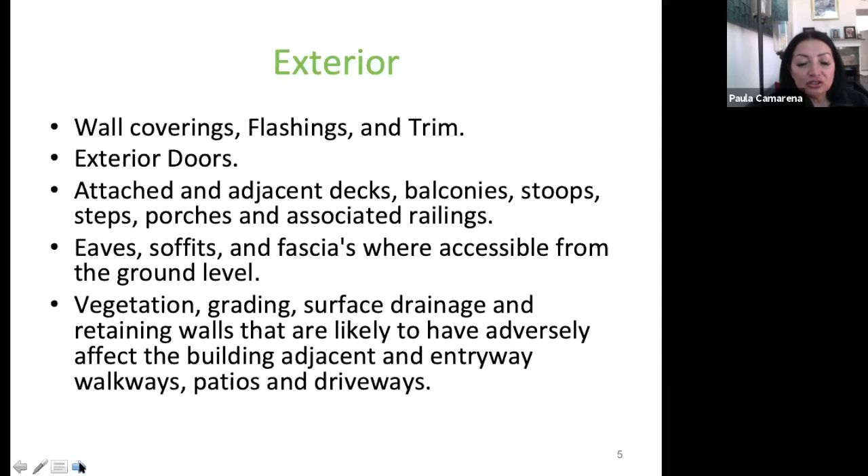So vegetation and grading, how the surface is draining. It's important that when you have a house, that when it does rain, that it's all draining away from the house, not towards the house. So the way that's graded is really important. You could end up with some real foundational issues if that is not taken a look at. So we look at that as well.

Roofing material, right? We talked about this. The materials, what type of roof it is. It's very important that we know what type of roof it is, because certain roofs last longer than other roofs, right? And then it's also going to require some maintenance, right?

So the one thing that I do say about roofs is great big trees are really nice, but keep them trimmed and away from the roof. They actually cause you to have rodents coming onto your roof, and it also wears the roof quicker than normal. So trees are lovely. We don't want to get rid of the trees, but just maintain the trees.

That's really important. Roof drainage system, we kind of went over that. It needs to drain away from the home, away from the foundation. Very important. Skylights, chimneys. Skylights tend to leak quite a bit. They will end up leaking at some point when you're in the home. It's important to keep an eye on that. So we do take a look at skylights.

Okay, and then we also have to describe the method that we use to inspect the roof. That is part of the ASHI requirements.

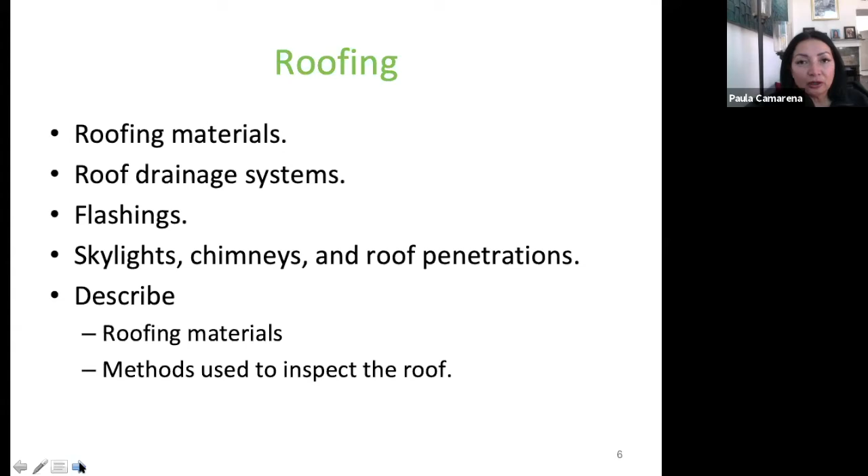Okay. Definitely look at the plumbing, all of it. We flush the toilets, run the faucets, blah, blah, blah. But on top of that, we want to make sure that everything is venting out correctly from a plumbing perspective. We want to make sure that the water heater and the hot water supply systems are venting correctly without causing any major issues, right? Fuel storage, things of that nature are very important.

We need to describe the energy source that the water heater is using. There are water heaters out there that are electric water heaters. There's nothing wrong with an electric water heater. Electric water heaters actually last longer than a gas water heater, but we still need to notate what type of water heater that is. And we also need to notate where the main water shutoff is. That's an important component to the home inspection.

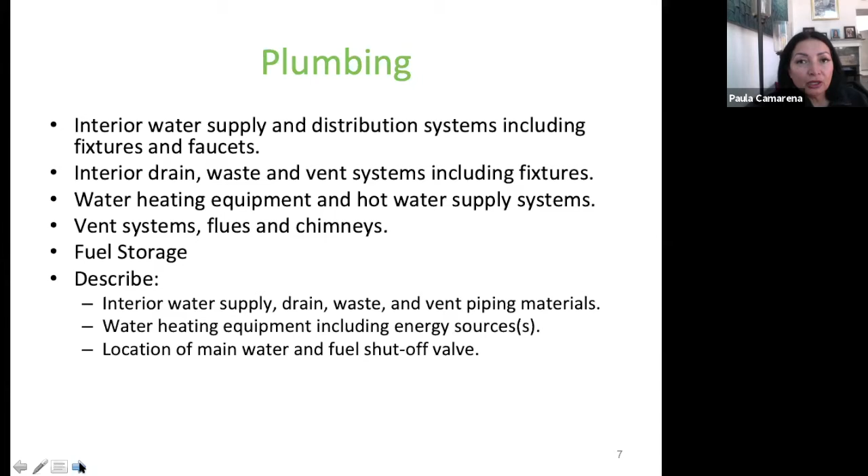And on the electrical system, the service drop. Where is the electrical coming? Is it coming from underneath the home or is it coming above? And then the entrance conductors and what type of materials those are. It could be either aluminum or copper, depending on the age of the home and how the home was built, right?

We show you all the disconnects. That's really important. The main disconnects are really important, and how the service is grounded. All that needs to be shown and actually explained in the inspection report, which is something that we're trained on.

Overcurrent protection devices. Is there too much current going through a particular circuit breaker? So that's one thing that we want to make sure we have a good handle on: is there just enough current running through the electrical panel and the circuit breakers and not too much? And we'll get into how we actually do that without touching the actual electrical panel, because touching the electrical panel, as we know, is not a good thing, right?

And then also the ground fault circuit interrupters, GFCI, right? Those all need to be where there is water. So if there is a sink, you need to have GFCI. So bathrooms, kitchens, garages that have sinks, they all need to have GFCIs next to them, any type of receptacle.

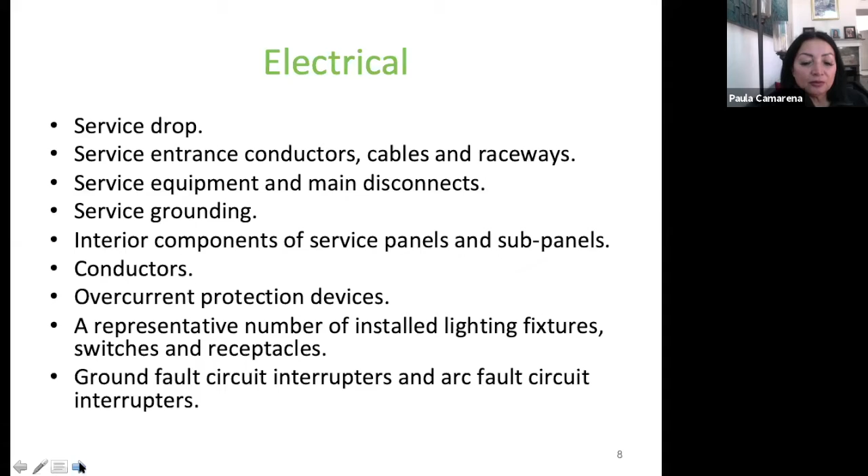The amperage, how big of an amperage do you have? The other day I went to a home, actually it was in the storm last Tuesday, that was, I think, pretty close to 1,700 square feet. It had 70 amps running through it. Wow. 70 amps is not a lot for a 1,700 square foot home. And I definitely did call that out because that is not a lot. For a home like that, it probably should have like 100 to 150 amps, but those are the things we kind of take a look at as well.

And then also any sub panels, right? And then we also need to look at the smoke alarms and carbon monoxide detectors. So carbon monoxide detectors are now required by the state. So I don't know if you know that, but those are required. And I doubt you'll be able to get your home closed unless you have a carbon monoxide detector. The good thing is they have plug-in ones and they're not expensive, and you can just go to Home Depot and buy one real quick. So that's not a big deal.

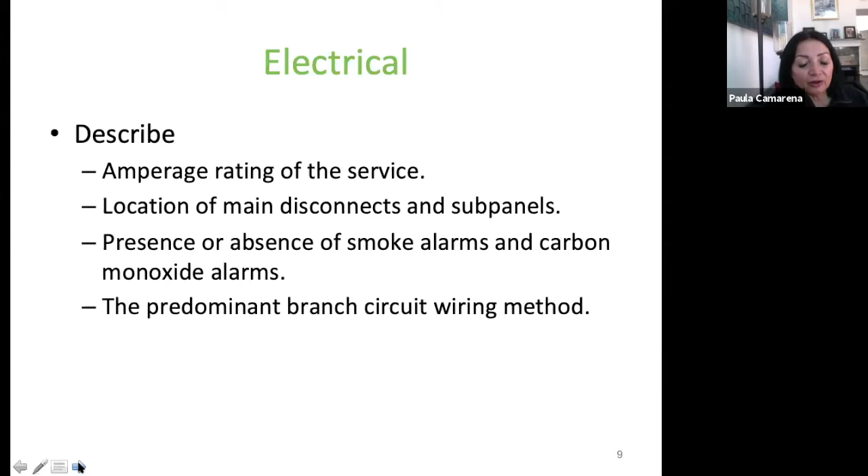Yeah, the only people who are checking that are the appraisers, it seems like. And if you're all cash, it's like nobody really checks that stuff. So it's up to the buyer to know that. So that was good that you pointed that out. Yeah. And then the branch circuit wiring in the panel does need to be, most of the time, copper. I really think that copper is the best, and that the branch circuit wiring in the electrical panels should be copper. There are some very few that I see that are aluminum, but it should be copper.

So we have a lot of houses that are older, even like my house, 1920s, and a lot of them are knob and tube still. What are your thoughts on that? I mean, you can live in any of these types of homes like knob and tube, but you just need to understand that there will be limitations, right? 2-prong versus 3-prong in your home, right? Some appliances may or may not work really well with knob and tube. Eventually, you may want to upgrade that.

But I do not call it out and say this is a problem, because like you were speaking, Nick, in your area, you have knob and tube, and there's a lot of historical homes in Orange that are absolutely gorgeous that still have knob and tube. And there's nothing wrong with knob and tube. It's just there is going to be limitations. I just let the client know that it does have knob and tube. You can live in this. It's not going to kill you, but eventually you might want to upgrade. Got it. So those are the things.

That's good. Checking the venting systems and flues and chimneys. Those are the things that we look at as well. And then, of course, I talked about the energy source and the heating systems. So let's talk about energy sources for a minute. We talked about carbon monoxide detectors and how they're really important and how it is a requirement. However, I've been in some of these high-rise buildings, particularly in Long Beach, that don't even have gas. They are all electric. So the question is, do they require carbon monoxide detectors still?

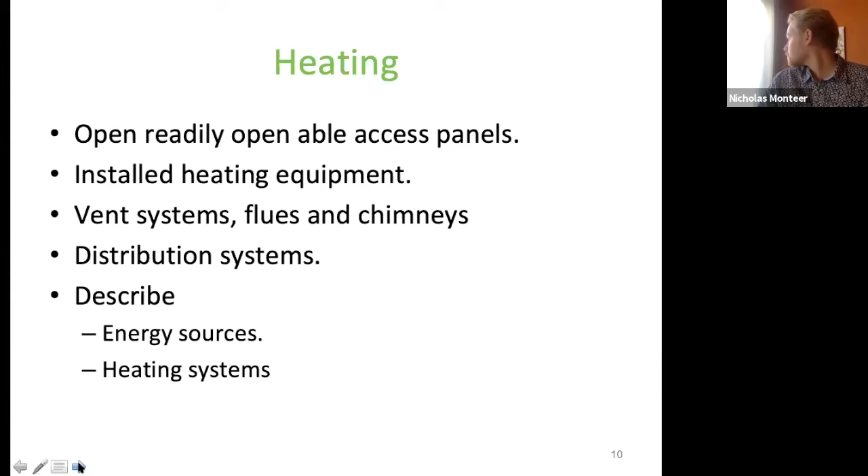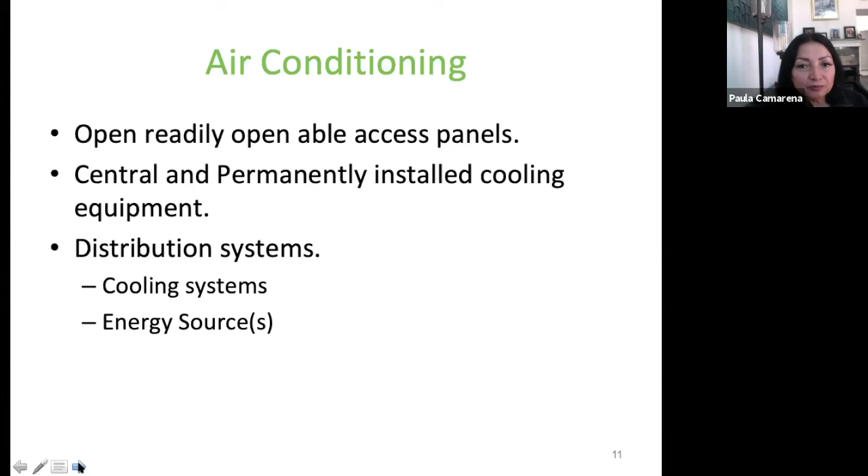And again, going back to older homes, a lot of them don't have the ventilation system installed, like the venting. So one of the things I was going to ask, do you recommend, say, hey, I saw enough space in the crawl space, you probably could get it in the crawl space, or do you suggest the attic, or do you kind of say that's not my business, I don't suggest anything? No, I would make a recommendation.

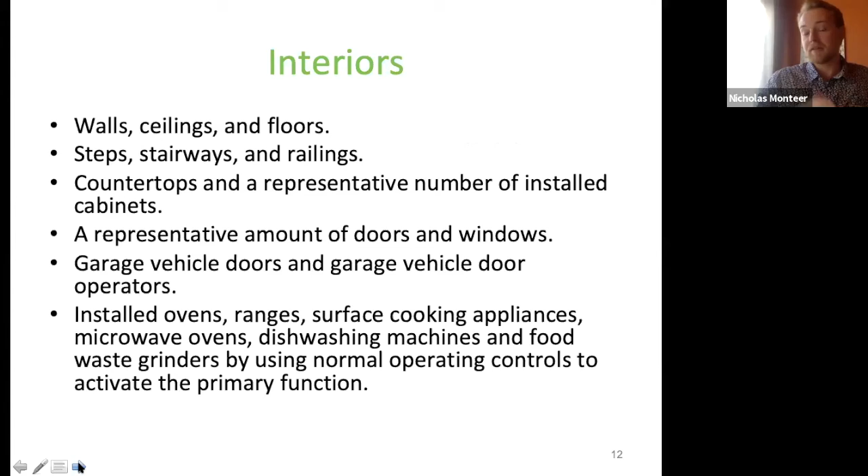If there's room in the attic, definitely do that, especially because it does get hot some places around here. So you do want to have some ventilation going on in your attic. An attic without ventilation could cause things like different types of growth, right? And it's really not good at all. You have to have some sort of ventilation going on. The air needs to flow through the home somehow, some way, even in the roof areas.

So that is important. I'll make a recommendation for that. And it could be figured out how to do that. There are many ways to put ventilation in, but I'll make a recommendation, and then again, do what you want. But I do make the recommendation, right?

Yeah. So as far as the interiors, walls, ceilings, floors, stairways, rails, all that type of stuff. When I'm talking about walls, ceilings, and floors, it's really important. We talk about cracks, right? There's so many different types of cracks that you might see. A crack is not that big of a deal. However, if you could put a quarter in a crack, you might want to investigate it a little bit further.

And then there's also a difference in how you see the cracks. If the cracks are coming diagonally from the window corners, and the doors are really difficult to open, those are indicators of possibly some structural movement in the home. So you want to take a look at that as well.

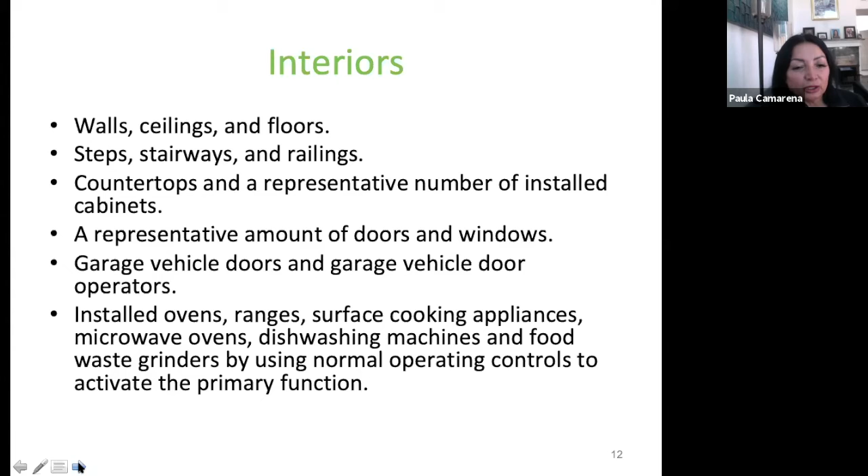Then of course we look at the countertops and everything, and garage doors, if they have the auto reverse, those safety issues, we want to make sure we're looking at it, right? And then of course all of the appliances, are they working correctly and doing what they should be doing? Dishwashers, I see a lot of dishwashers that are not working properly, meaning there's some leaks or something like that underneath the sink.

We talked about insulation and ventilation. Insulation and ventilation really help out with the cold and the heat. We look at the dryer exhaust systems. And nowadays there are washers and dryers that don't actually require exhaust. So for the lint, they don't actually vent out anywhere. The newer technology is they're making dryers that don't have to vent out anywhere. They actually are doing that internally.

So that's going to be the new thing in the future. You're going to see a lot more washers and dryers that do not require venting out anywhere. I have a pair that's rather new, and they vent internally. They don't vent out of the home. Really? Do you notice any issues with maintenance or anything, or are they all good? No, they're good. I love it. Oh, wow, that's amazing.

Yeah, this is going to be the new thing, Nick, because of course you've heard of fires with lint getting stuck in the tubes and all that type of thing. That's happened several times. And because of that, they've been really working on trying to get rid of those altogether. And believe it or not, it's happening.

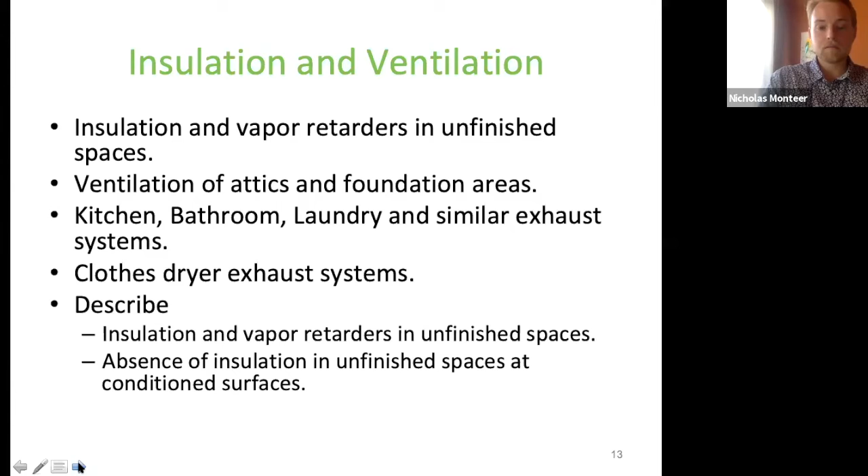I live in a condo, as you can tell, and I got little stackable Mieles that actually vent inside of themselves, so that there's no venting at all. And they're really nice. That's great. Yeah. So more to come on that.

Like fireplaces and things like that, we want to look at that. Most likely I will recommend, depending on the age of the fireplace, make sure it's cleaned, and make sure that everything is working perfectly on those, because that can be a real problem if the fireplaces are ignored. You want to get a chimney sweep. You want to make sure that it's working properly, especially in the older homes.

And I know there's a lot of beautiful homes in Long Beach that have really old fireplaces. You just want to double check them, make sure that they're sound before using them, right? Or just don't use them. Some people just don't use their fireplaces. They just put a decorative something in the middle of it, and that's fine. But I'm a fireplace girl, so I will use my fireplace. I love it. Yeah.

Okay, so a little bit about what we do at Pillar to Post, a difference with us. So we're the largest inspection company in North America. There's probably about 700 of us nationwide. Our training and all of the reporting are helping you and helping our clients. And that's what we're really here for, making sure that we're doing the best job that we can, and that we're providing you with the best service that we can.

And part of that for me is really just following up with you as the agent and making sure that if you have any questions, I answer those. And then also following up with the client after the inspection and before the inspection, because sometimes a client will go into a house and they'll say, I've always wondered about this. What do you think? So before I even go to the inspection, I call up the client and I say, hey, is there any questions I could answer for you now? Is there anything that you want me to pay closest attention to?

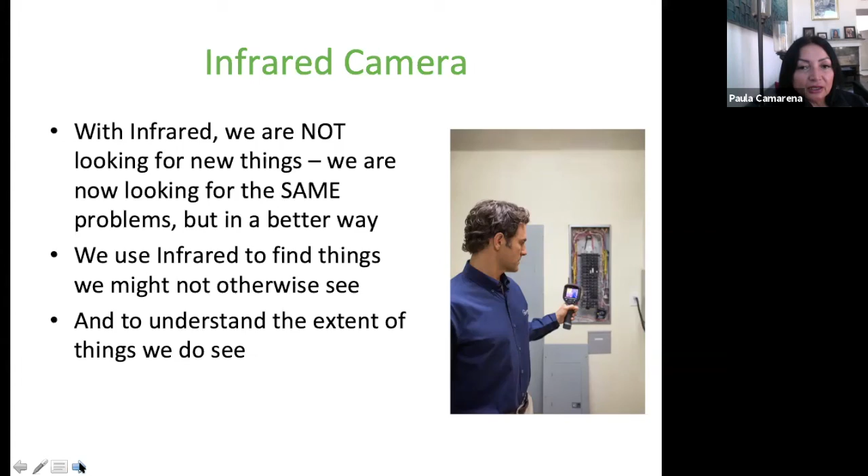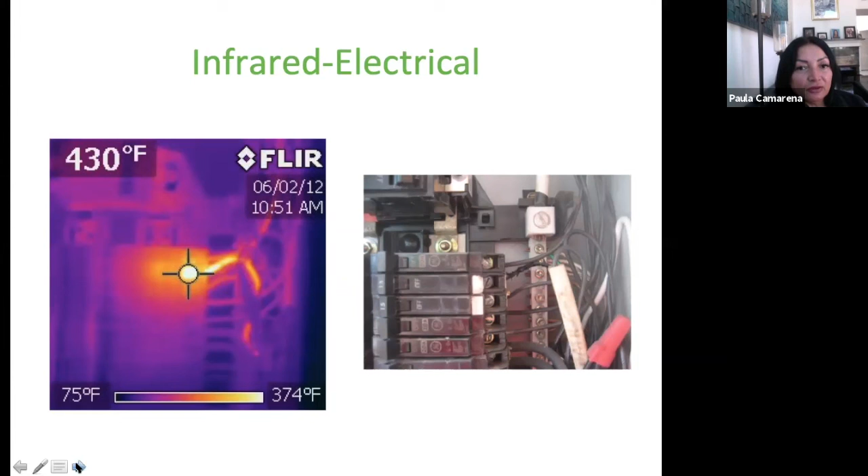A good idea. Jeez. And then lifetime maintenance advisory services. So what does that really mean? Well, we've been around for over 20 years, Pillar to Post as a whole, and there's always someone to answer your questions, even if I am not around for some reason. That's what this means. So just so that you know.

And my commitment to you is really, I pick up the phone. I mean, that's really what you want when you have an inspector. Do they pick up the phone? Are they ever going to return your call? Of course, absolutely. That's what I do.

So we'll talk about the Healthy Home, which is a prestige package. So Healthy Home is for people who have asthma, allergies, sinus issues, chronic breathing disorders. Everybody wants the Healthy Home, and that's the prestige. ERMI, Environmental Relative Moldiness Index. So what we do is we actually take a sample of the air in the home, or actually little particles in the air, which is dust basically, and we send it off to a lab, and then it's going to give us, based off of the Environmental Relative Moldiness Index, how this home rates.

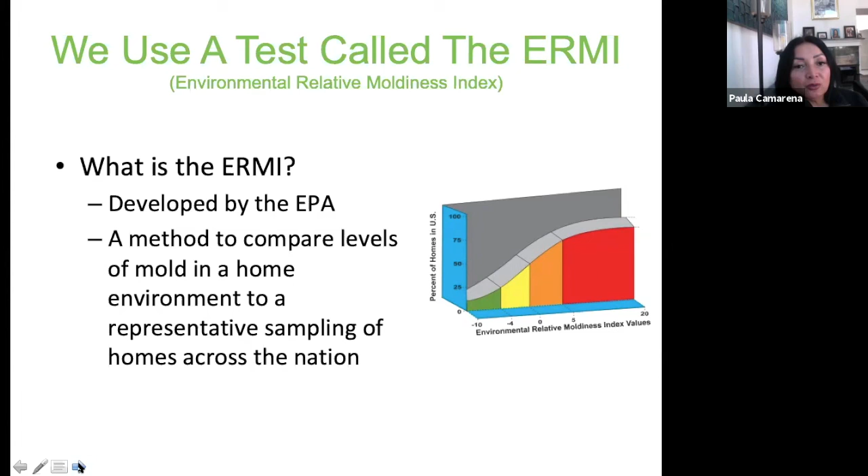But because they actually had this ERMI test done, we were able to detect that there was something going on in the home, and we were able to get somebody out there to look closer and find it and mitigate it. That was a huge win for us. So people do get this, and basically the wife of the gentleman who purchased the home was extremely allergic to mold, and that was the one thing he was very worried about. He said, my wife is extremely allergic to mold. I want to make sure that we clear everything, and good thing we did, because we found something.

And that's pretty much it for today. But are there any questions? Do you have any questions, Nick? I think the biggest thing is this. I was going to ask you earlier, how do you go over the report with a client if they have questions, but it sounds like they can just call you and get a hold of you at any time, which is pretty cool.

Yeah, typically pre-COVID-19, if the client was there during the inspection, I would, at the end of the inspection, take them for a tour and tell them what my findings are, kind of explain things to them. And again, anything can be repaired. I always say that anything can be repaired. This is nothing scary. People kind of freak out because it's the biggest purchase of their life most of the time. So they freak out when they see these things, but anything can be repaired. And I take them through and explain things to them.

But COVID-19, let's talk about that. So right now, usually the realtor is letting me into the home. I inspect the home, and I deliver the report. And then I have a conference call with the client and the realtor, and we have a discussion just like we're having right now, and I can answer any questions that they might have. So that's how it's handled nowadays. So it's very open. There's complete transparency, which I think is the biggest thing.